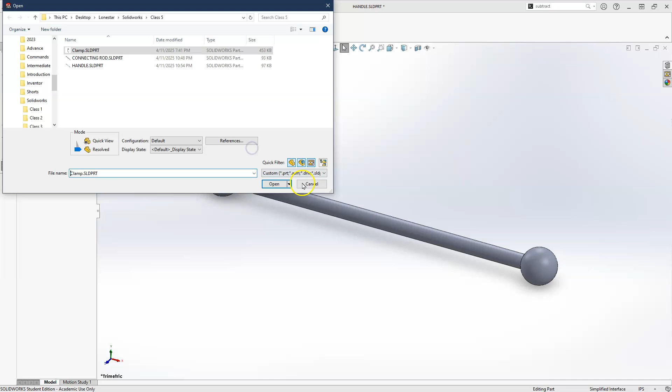So I did do some drafting to three different things. We created a connecting rod, we created a handle, and we created this loft, and that's what you see here on the screen. Now I'm going to put all of these together.

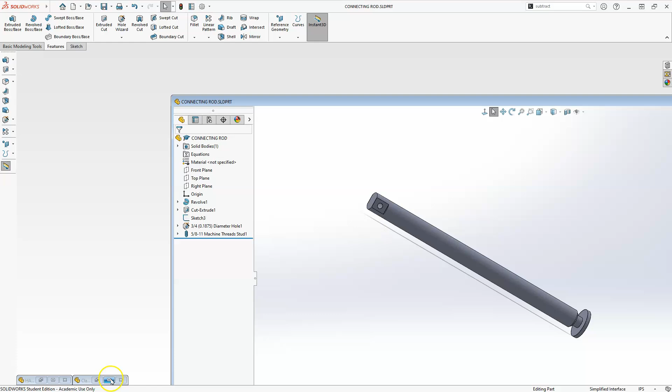So I have this open. Let me minimize this one, and I should have the other ones open as well. So here is the connecting rod, there's the clamp, and I also have the handle open as well.

Let's go ahead and start by clicking the new icon, and this time we'll be using the assembly, go ahead and hit OK. Here in a second it should load up, and you should see your ribbon has changed.

It's asking us to do some other things. I can select components, and you can see I have these components open, so that makes it really useful if you do have them open.

If I select the clamp right now, it should show it on my screen. I have some rotational options and things I can do to it, but that's why usually when I create an object, I create it in the orientation I want it to appear, especially a large object.

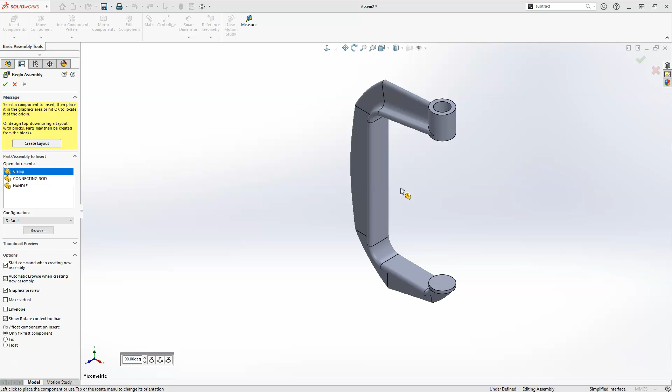I'll just do a left click here, and it will go ahead and place in my first component. So this one is locked in. Let's go ahead and bring in another component.

So I'll go to Insert Component, go ahead and bring in a connecting rod, and let's go ahead and place that here. And then I'll go ahead and bring in the handle.

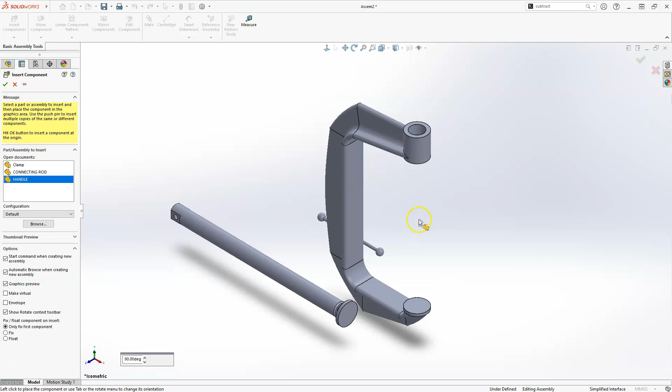Now we have all of these components that I need to create. This is really simple. If you've been doing a lot of the drafting and modeling stuff we've been doing in a lot of these videos, this should be no surprise to you. It should be nice and easy and simple.

I'm going to start off with a mate, and when the mate dialog box appears, we have to tell it basically what we want, and a lot of that stuff is going to look really familiar to you. You can see that we have coincident, parallel, perpendicular, tangent, and some other lock features.

You do have some other tabs here depending on what other type of things you're trying to do. So if you have something that is maybe a hinge or something of that nature that you want to roll it around with, you have some other options and tabs here that you can use to make things easier for you.

One thing I like to do is create my components, and here's the most important part of why I try to keep things centered. You're going to see the huge benefit of that, especially when we start creating these shapes.

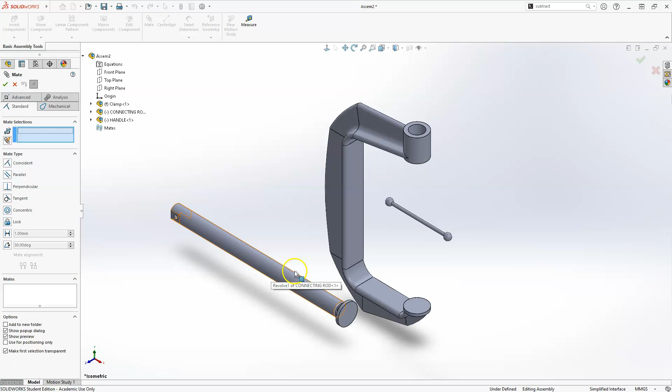I'm just going to go back to the standard, and I want this part here. Let's go ahead and select this outside part, and I want it concentric to that guy. Right now it's giving me a tangent, but I don't want it to be tangent.

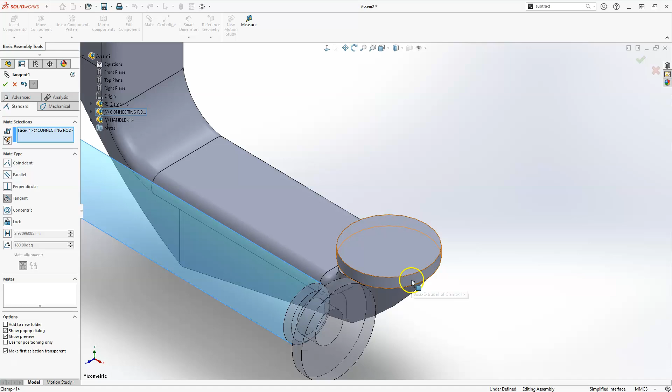I accidentally meant to select the other icon here. Let's go ahead and hold down the shift button and deselect here, and then select the outside here. Now it should give me an option to make it concentric.

I'll zoom out a little bit, and you can see that it's going up this direction. You do have some other options down here where I can flip things and move them around in different orientations, and you can see this kind of flipped it, but not really the way I want it to. But you're going to have some options.

I'm trying to remember the actual terms here. You have one that's called aligned, and it's showing me in the tooltips here, and anti-aligned. In Inventor, those are called mates and flush, and it's going to be a lot simpler to use, especially in Inventor. But in this case, this is kind of what we have, and you can just cycle through whichever ones you want.

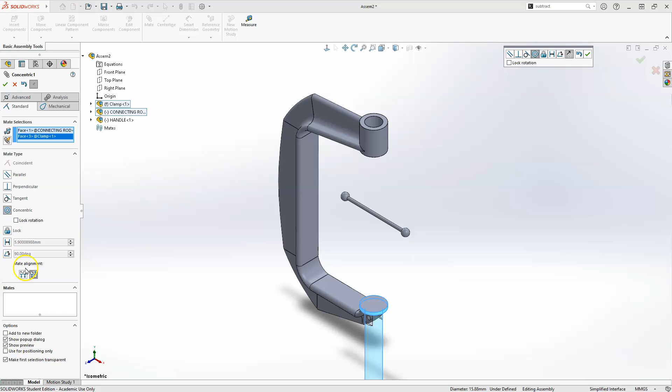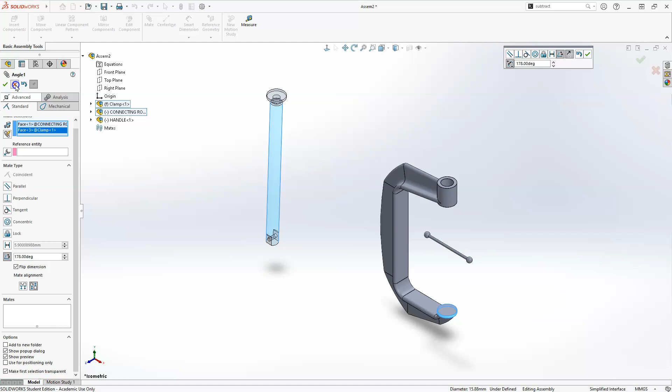Maybe if I give it an angle of 180, let's see what happens. Okay, I'm just trying to get this to stand up for me. Let's see if I can get this off. Sometimes this acts a little weirder than I want it to. Okay, I digress on this. All right, I'll leave it, looks like I lost my concentric anyway. Let me go ahead and cancel this, and I'll do it a much simpler way.

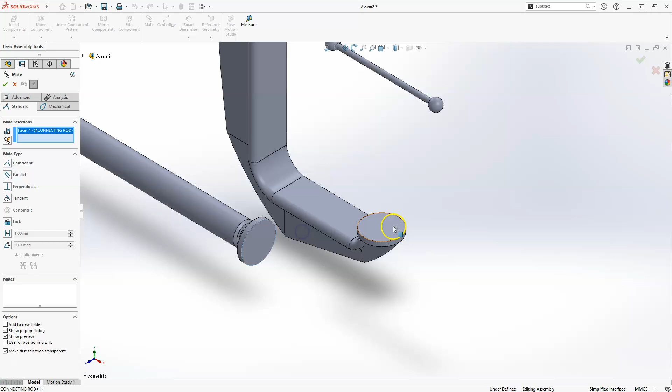Let's go back to the mates. This time I want this face to be with this face. So the first thing I'm going to do is say, mate these two faces with each other - grab that face and that face. You're going to see that it should stand it up and put it that way. So I have the faces locked. I'll go ahead and accept this.

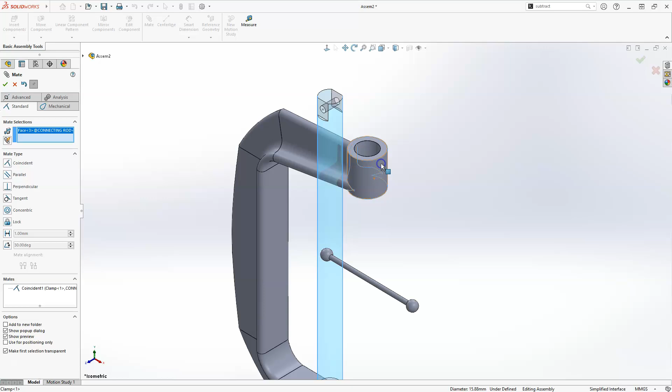All right, the next mate I'm going to do is select this body and this body. What SolidWorks does, a good thing, is it will predict what you want to happen. So you're seeing that I get a concentric already happening just by picking those two faces. It says, hey, this is one of the most logical choices you can have. I'll go, okay, that looks good.

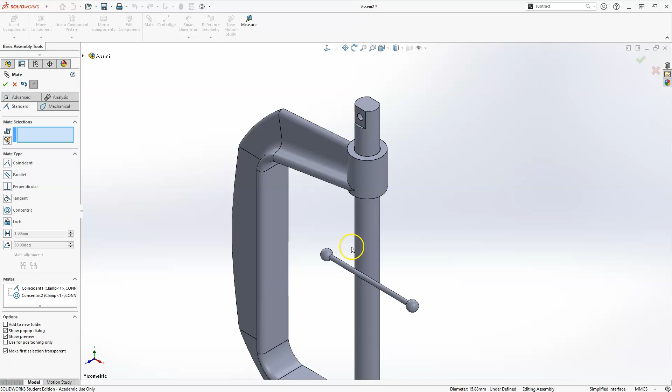And then I'll go with this face here, and then to the inside of that face, right? It says, okay, I can handle that, and you can see I do get another concentric. Here's that flip I was looking for earlier. But here are all the things we can do to this - these are just a shortcut list of what you see here on the side. I'll go okay to this.

Now I want to make this thing symmetric, to be right in the middle of this. So do we have an option for that? I can look around and play with this symmetric before, but it does act a little weird from what I understand.

But we do have these planes on the inside of this. So if I expand here and find the connecting rod, let's go ahead and expand that. And we're going to also expand the handle - I do apologize, my computer is running super slow. Come on, expand it. There we go.

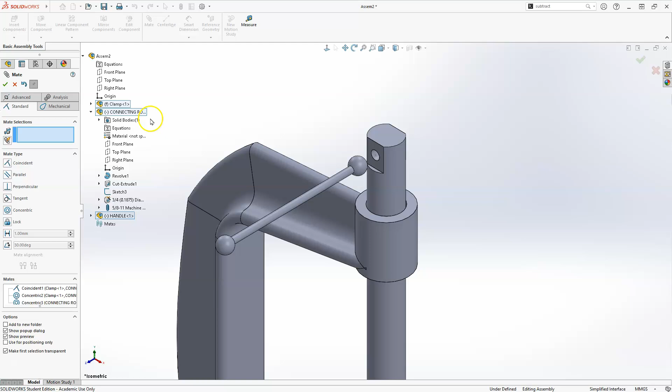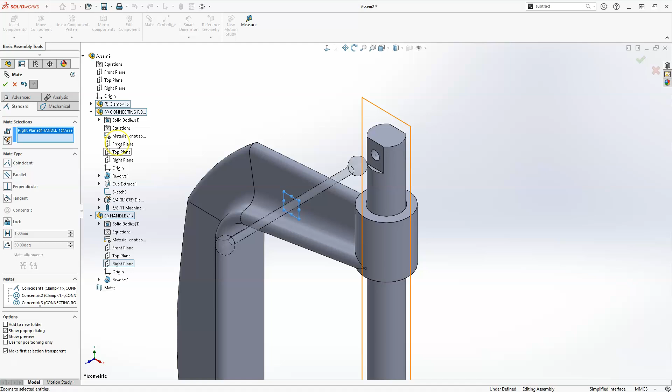Okay, there we go. So now I'm going to do a mate, and I'll start with the handle, and you can see these planes that I created. I use these planes - I created my part purposely so I can use these. So I'm going to use this right plane here, and then when I come up on here, I'm going to use the front plane on here. It should mate those two together. Let's go ahead and check that.

All right, so this is probably one of the easiest assemblies you're going to do. But one of the more important things to remember, especially in this program, is that it will do some of the predicting for us. Let's close this guy. It will do some of the predicting for us and pre-select what we want to happen. Now you have distances and other things of that nature you can add to it. But for simple assemblies, especially if you're new to SolidWorks, I'll try to keep the assemblies as simple as possible, using simple mates to put them together.

Okay, so hopefully I was kind of fumbling through this, but hopefully you understand how to make a basic assembly here in SolidWorks. We will try in future videos to come across and make some much more complex things. But for this video, I just wanted to give you an introduction on how to mate things and put them together.